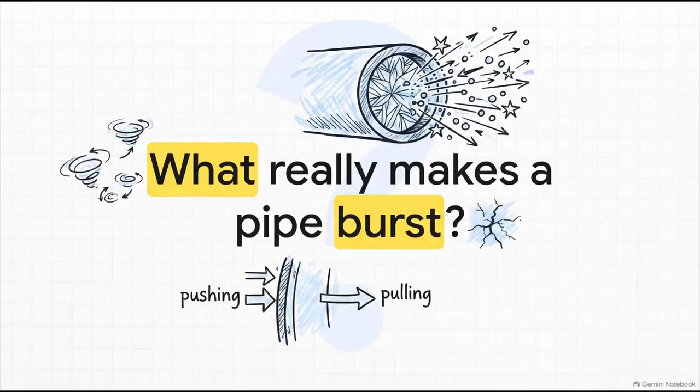To really wrap our heads around this, let's shift our perspective. Imagine you are a highly pressurized drop of fluid rushing inside one of these pipes. When you're inside that system, it isn't peaceful, it is violent. You and millions of other fluid particles are crashing against the walls, pushing, pulling, and twisting the very structure that contains you. So what forces are actually keeping that metal from violently ripping apart? What really makes a pipe burst?

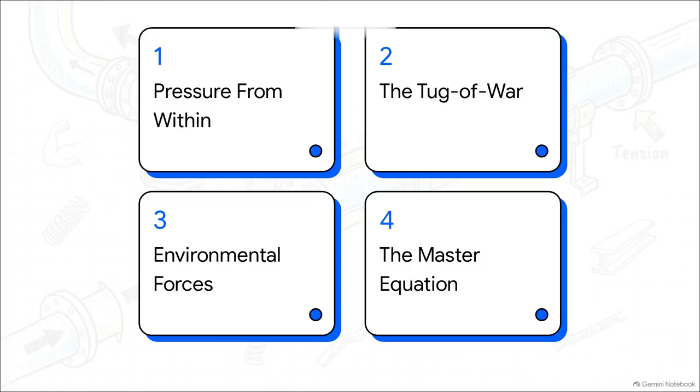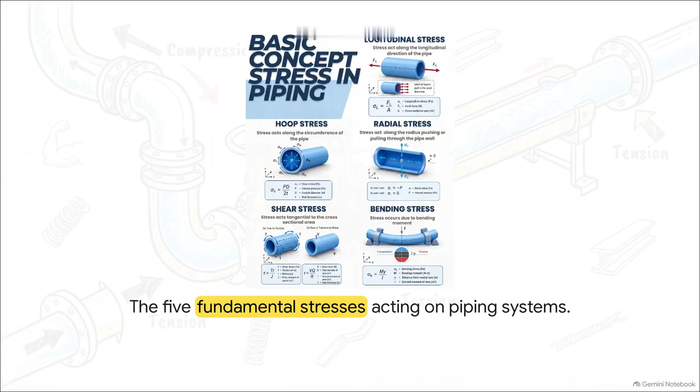Let's dive into our roadmap for today. We'll be looking at: 1. Pressure from within, 2. The tug of war, 3. Environmental forces, and 4. The master equation. These are the fundamental stresses engineers have to calculate to keep our infrastructure safe. We're going to break down exactly how internal pressure, axial forces, and environmental factors all act simultaneously on a single pipe. By the end of this explainer, we'll be able to read these overlapping equations exactly like expert engineers do, mapping them straight onto the real physical world.

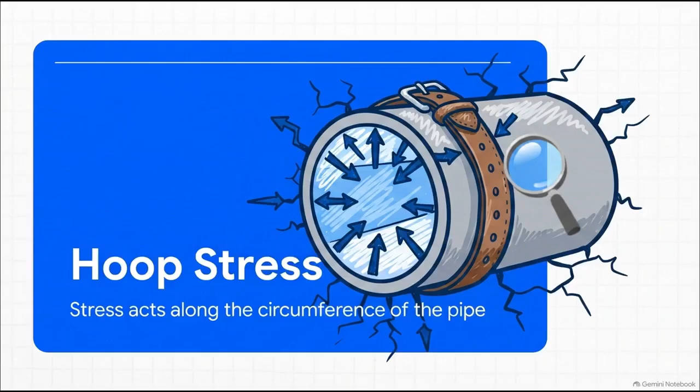Section 1: Pressure from within. Let's start from the inside out. The very first force we encounter is called hoop stress. Think about how a tight belt feels after a massive Thanksgiving dinner - that outward pushing force, that's hoop stress. It's the fluid inside pushing outward in all directions, trying to split the pipe straight down the middle, acting entirely along the circumference. You can visualize this with those blue arrows labeled sigma H.

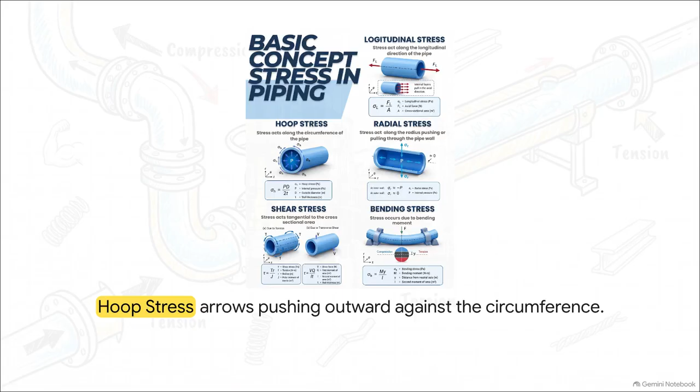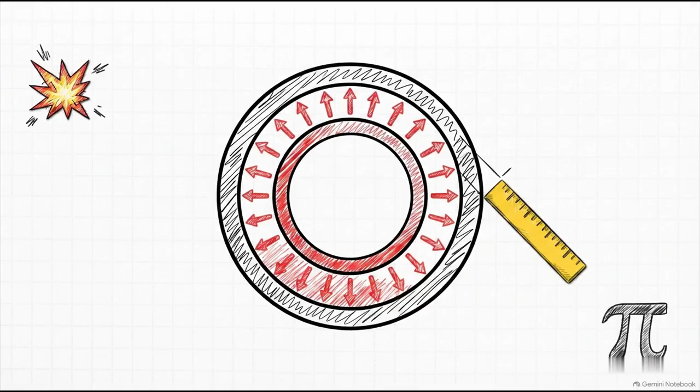They show this outward expanding pressure perfectly. We can clearly see how the fluid inside is constantly trying to stretch the pipe's diameter wider and wider, which means the pipe material has to continuously fight back just to hold its shape. Translating the math here into plain English, hoop stress goes up when the internal pressure and the diameter of the pipe increase. Makes sense, right? A wider pipe literally has more surface area for the fluid to push against. But if you look at the denominator, we can reduce this stress by making the pipe wall thicker. It's this fascinating direct balancing act between the fluid's pressure and the metal's thickness.

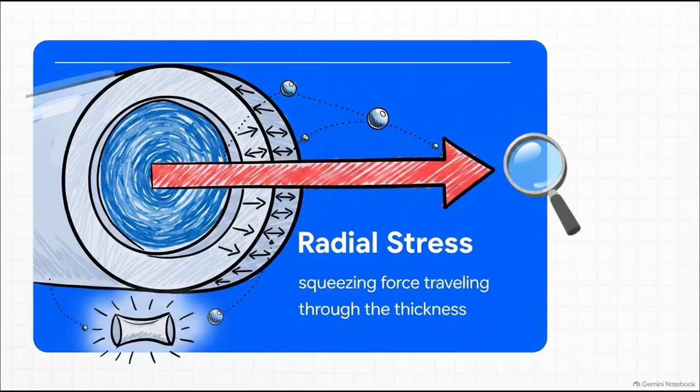But hoop stress isn't flying solo here. Still looking from the inside, we've got radial stress. If hoop stress is the fluid trying to stretch the pipe like a balloon, radial stress is the literal squeezing force traveling straight through the thickness of the pipe wall itself. It moves right from the inside directly to the outside. And this is such a brilliant contrast.

The inner wall is taking the absolute brutal brunt of that internal pressure, which is why the stress there is roughly equal to negative P, representing that really high compressive force. But as that force travels through the thickness of the metal, it completely dissipates. By the time you reach the outer wall, it experiences practically zero radial stress. The inside is fighting for its life, while the outside barely feels the thing.

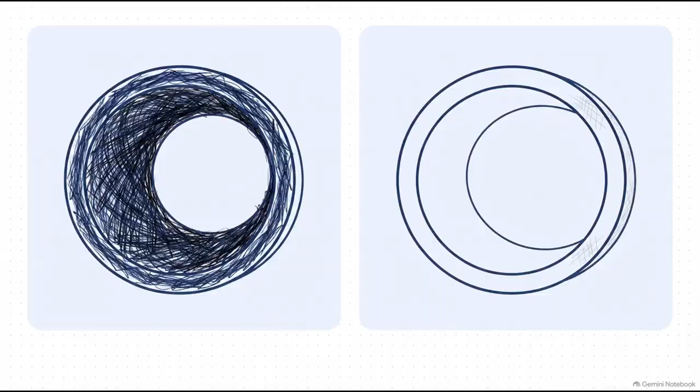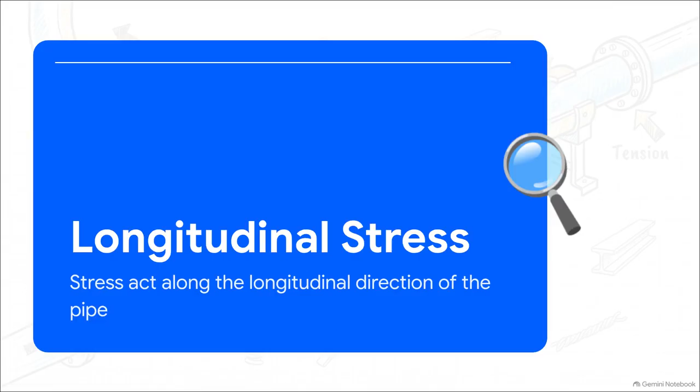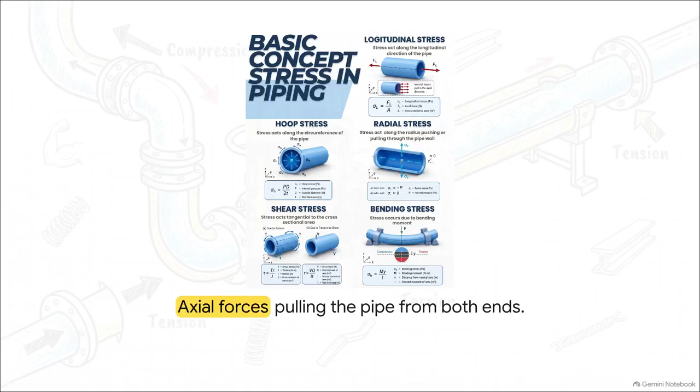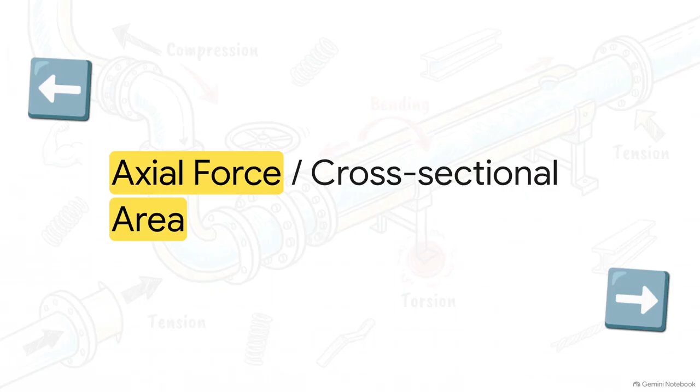The math for this is pretty straightforward. This stress is calculated by taking the total pulling force, that's FL, and dividing it by the pipe's cross-sectional area, A. More force obviously means more stretching, but a pipe with more metal, meaning a larger cross-sectional area, can better resist that stretch. It's a pure test of the material's tensile strength.

Section 3. Environmental forces. Now we're zooming out entirely. We need to see what happens when the outside environment starts physically manipulating the whole piping system, because pipes don't just float in a void.

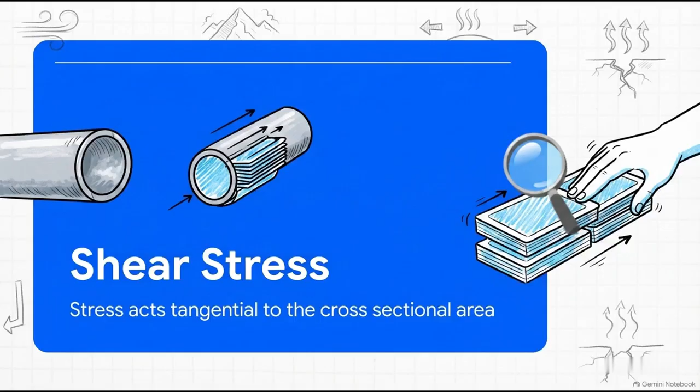This brings us to shear stress. Unlike the pushing and pulling we just covered, shear stress happens when forces push parallel to a surface. It's essentially the environment trying to slide layers of the pipe past one another, almost like sliding the top half of a deck of cards off the bottom half.

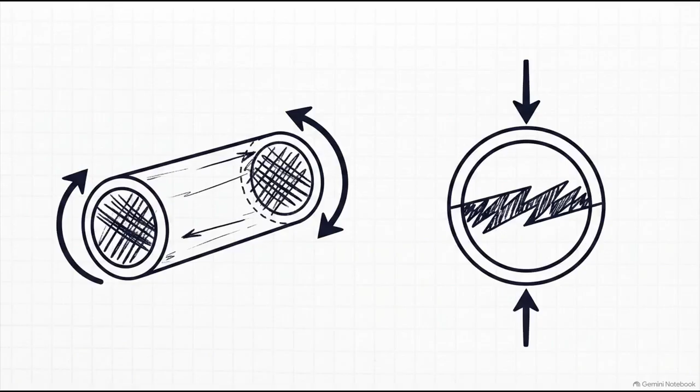This usually happens in two main ways. First is through torsion, which is a twisting force. Imagine wringing out a wet towel, but you're doing it to industrial steel. The second is transverse shear. That's a direct, cutting force pushing straight up or down across the pipe, and it's often caused by the sheer weight of the pipe resting heavily on a support beam.

And closely related to that weight is bending stress. This is exactly like the forces at play when you snap a twig over your knee. Bending moments cause the pipe to physically sag or bow in the middle, whether it's bridging a big gap between two supports or just holding the heavy weight of the fluid inside.

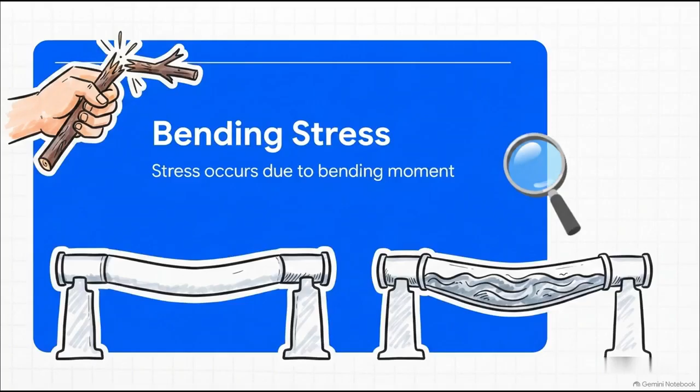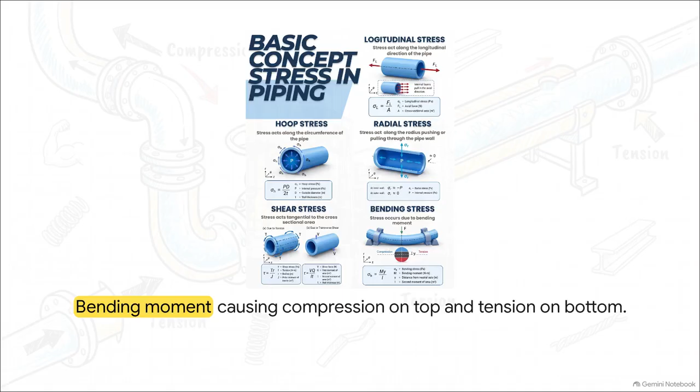When a downward force acts right on the middle of a suspended pipe, it creates this fascinating duality. The top half of the pipe gets squeezed together, that is, compression. But the bottom half of the pipe is being stretched apart, and that's tension. The metal is literally fighting two completely different battles depending on whether it's above or below the center line.

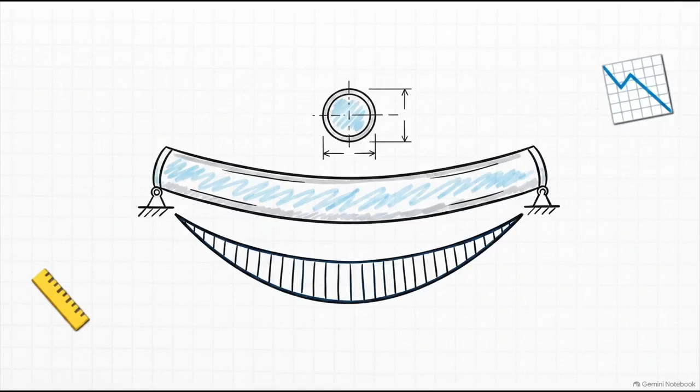To figure out this bending stress, represented by sigma b, engineers multiply the bending moment by the distance from that neutral center axis, then divide it by I, which is the pipe's unique second moment of area. In plain terms, this proves mathematically that the shape and thickness of the pipe dictate exactly how well it can resist sagging under immense weight.

Section 4. The master equation. We've looked at the individual battles, the expanding, the stretching, the twisting, and the bending. But now we have to look at the entire war zone. It is just mind-blowing to realize that a real-world pipe never experiences just one of these forces in isolation.

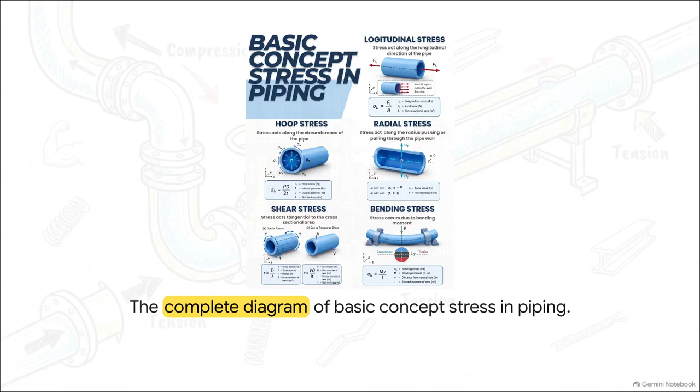It faces hoop stress trying to burst it, radial stress squeezing its walls, longitudinal stress pulling it apart, shear stress twisting it, and bending stress bowing it, all at exactly the same time every single second of the day. It literally is a dynamic battlefield of physics, hidden right in plain sight.

Engineers have to miraculously balance every single one of these formulas simultaneously. They have to select the perfect material, the exact wall thickness, and the absolute optimal support structures to ensure that all these overlapping stresses never exceed the breaking point of the metal. That's how we prevent catastrophic failures in our cities and factories.

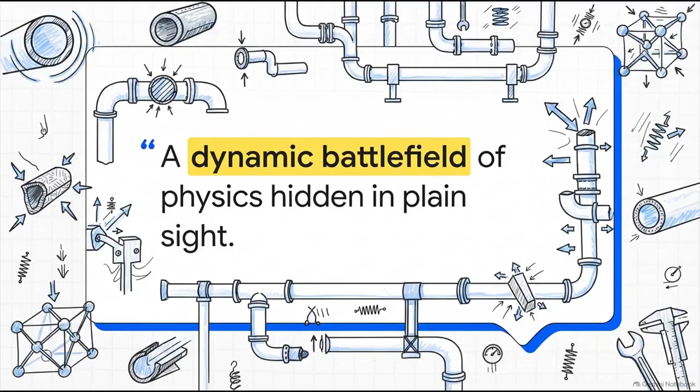It really makes you look at the built world a little differently, doesn't it? So I want to leave you with this thought. Next time you pass a massive industrial pipeline, a sprawling refinery, or honestly, even just your home's humble plumbing, pause for a second and ask yourself, what intense, invisible battles are raging inside that metal right now?